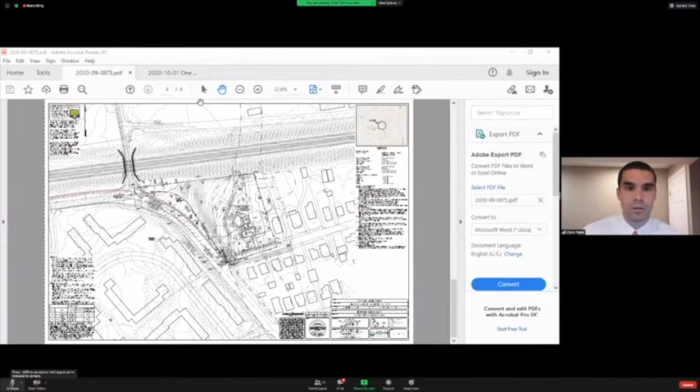So if I could forward to the first plan. So this would be, I'm going to start with the subdivision. The current owner is the owner of this 3 Elmwood property. There is this parcel line that you can see a little more clearly on this plan that separates the property into a Narberth portion and a Lower Merion Township portion.

My understanding of how that line was created was this used to be the orientation of Wynwood, and when it was adjusted to have a more gentler curve, there became a portion on this eastern side of Wynwood that is a portion in Lower Merion and a larger portion in Narberth. So what we're proposing is a new property line that's along the center line of the stream to separate the 3 Elmwood property from this property on the Wynwood side.

And then we have another property line separating 2 new multifamily buildings. They each would have 5 units in it, so there'd be a total of 10.

There currently is sidewalk along East Wynwood, which right now is right next to the curb. And so through some comments from the township, county, and borough, we're now showing a new 5-foot wide sidewalk that's pushed a few feet off of the curb. What we're showing on this plan is a shared driveway that has an ingress on the Lot 2 side and an egress on the Lot 3 side, with a shared parking lot in the back. We do show some covered parking in the back. We show a trash area, a loading space, and all of that would be shared between the 2 buildings.

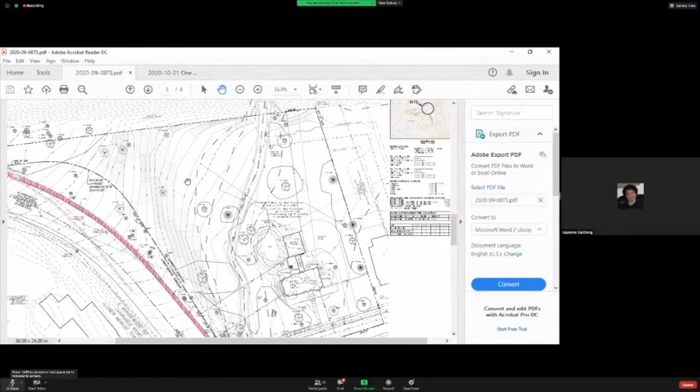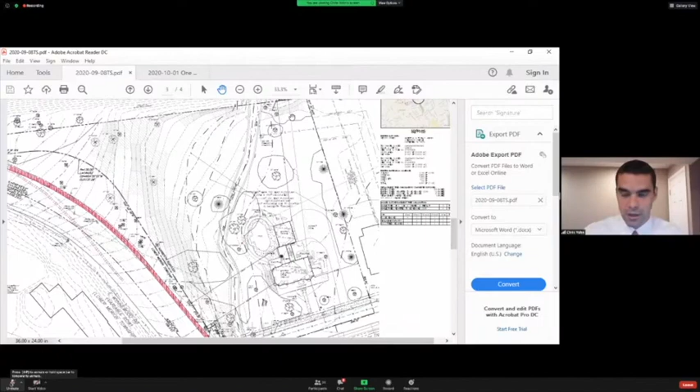If I could go back to the existing conditions plan for a second, you see the stream going through the site. These dashed lines are contour lines, and where the lines are closer together they are 1 foot apart in elevation - so closer together means steeper, you go up faster, and further apart means flatter. You can see there are not as many contour lines on the 3 Elmwood property, showing it's a much flatter property, whereas this East Wynwood side slopes up more steeply.

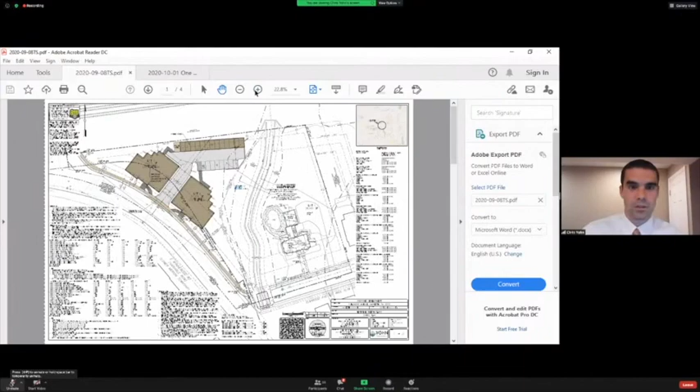The reason I show that is East Wynwood is sloping, which makes putting the units there a little trickier. What we've proposed is this unit on the right and one on the left. There are 3 levels, but on this lower level, this building on the right is more at grade, and because we keep sloping up to the left, this is really tucked into the grade, so we don't have this lower level unit on this building. On the lower level there's just one on the right, and the second and third levels would each have 2.

Conversely, on this unit, on this building too, this unit on the right is down at a lower level, a little above the floodplain. As you come up the road, on the lower level, this area would be tucked into grade, so on the lower level we only have 1 unit, on this right-hand side again, and on the second and third floor there's 2. So each building has 5 units - both have 3 on the right and 2 on the left in both cases.

Todd, did that help answer your question about the massing? Sure, we'll take that up as a topic a little later on in depth. Is there anyone else from your team who'd like to add anything of an introductory nature at this point?

Before that, a couple things I'd like to go over quickly about the engineer's letter. Item number 5 talks about the property lines. Basically the code, the subdivision code, suggests property lines should be perpendicular or radial to streets. What we're proposing as the property line between lots 1 and 2 is a meandering line that follows the stream, so we would require a waiver of that code section for that property line. I'm interested in the Planning Commission's feedback on that.

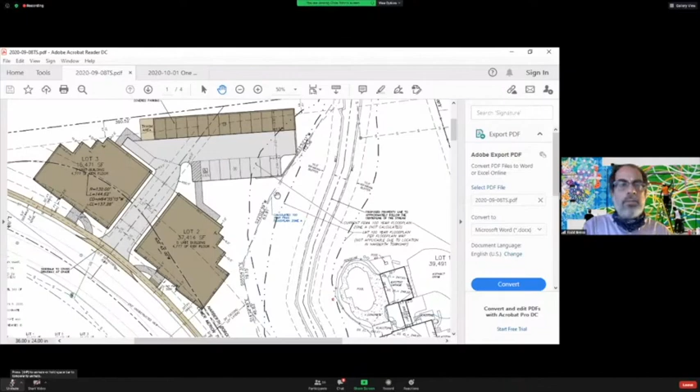So like I said, there's a lot to digest here, but I'd like to break it down into a couple topics. First, just as a formality, I want to thank your team for coming here for this informational meeting. Fred, I'm sorry I didn't do that at the beginning.

Vince — secondly, just for the public at large, I didn't say at the meeting, and we can discuss this more toward the end, but typically a land development process has 3 stages of review: a tentative sketch plan, preliminary plan, and a final plan. At each stage the project comes before the Planning Commission and before Council for approval. The whole process can take 6, 9 months, a year, or longer, depending on the nature of the project.

So this is the very first public meeting we've had about this. This is the tentative sketch plan phase. Based on what Mr. Fromhold said, we'll be back talking about this again, most likely in November. So this is the beginning of a long series of meetings on this project, both at the Narberth Planning Commission and Council. And as Fred alluded, we're in constant conversation with Lower Merion about how to coordinate our reviews, and there might even be joint meetings between our planning commissions. So that's a quick sketch of where we are in the process.

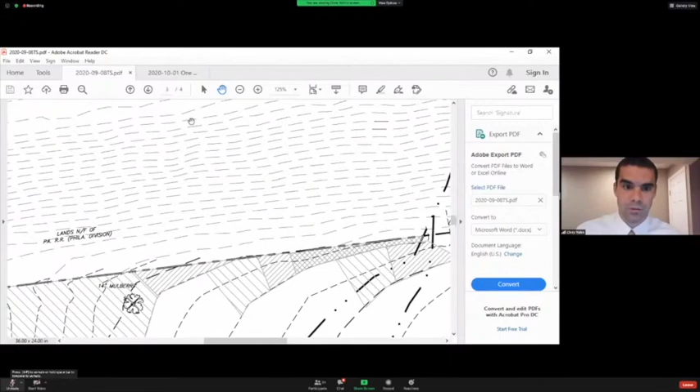We have 3 different slope patterns on the plan. The double crosshatch represents slopes that are 25% and greater, which are up through the train tracks, and as the embankment gets closer to the property line and eventually into the property, that's where there are some 25% slopes. The next range is 15 to 25% slopes with a crosshatch, and then 10 to 15% with crosshatch going the other direction. These are slope boundaries that the Lower Merion Code asks us to show on the plan.

So you can see some of those through the site. Again, the 25% and greater up here, but yes, there are some 15 to 25%, a couple ranges, and then some other 10 to 15%.

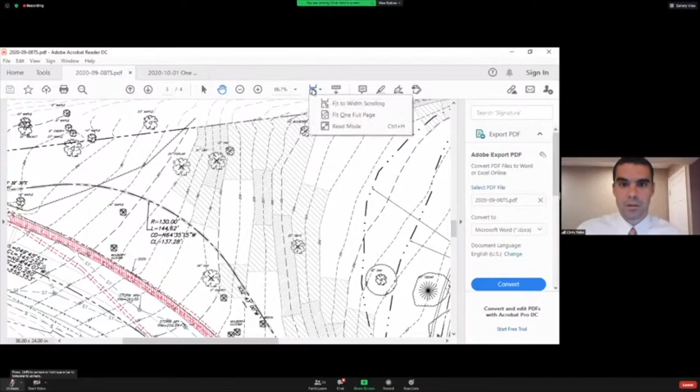So if I go back to this second page, we're not required to have all of it at this stage. My understanding of the tentative sketch phase is mostly to get the building location, driveways, access, dumpsters, and loading considered, not necessarily all the grading, stormwater, and erosion controls yet. However, we are supposed to consider that.

So we did show some spot elevations on this plan. We put approximate floor elevations for each building. For this driveway, out at the street, here's the 261 contour line, and we have a 261 spot shot back here where the buildings come together. It slopes very gently to the back of the buildings at 260.3.

I worked hard to get a relationship between the two buildings where there was not more than a 5% slope, so you could walk out of this building, come over to this handicap parking space, which can't be more than 2%, and then slope back up to 5% again to get into the other building, so there wouldn't be any ramps needed between the two.

Now, as that relates to the rest of the buildings, that's what makes this left half of lot 3, or the unit 3 building, tucked into the embankment a little bit. We show some spot elevations just to push a swale around.

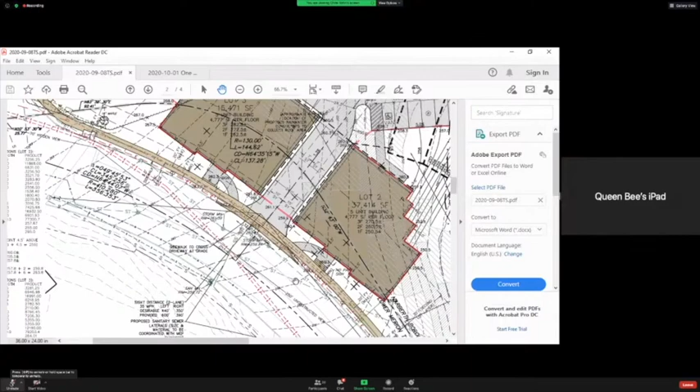So the front yard setback is determined from Lower Merion. Similarly, I don't believe Lower Merion has a regulation on where the first floor height has to be relative to the existing grade, which I know Narberth does, but I'm viewing that as not applicable since the front of the buildings aren't in Narberth. I do know we've gone through this on another project where I feel the Narberth code is unclear, at one point talking about what the first floor elevation should be relative to the grade along the front facade.

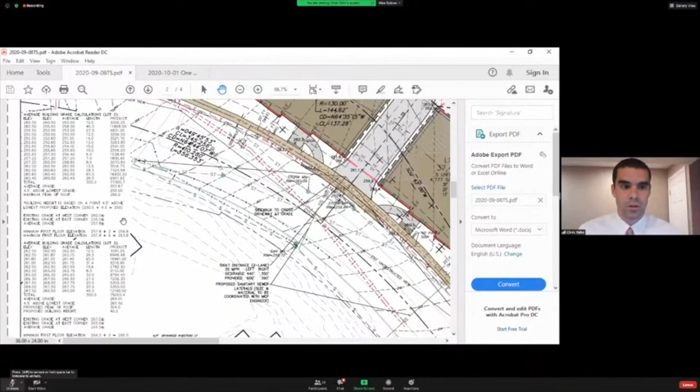At another point, it talks about the height of the building being measured from the average grade, but then in the definition for height, it mixes the two together. So on another project, to make it easier, we showed that it worked both ways. I haven't done that here, partly because I don't think what happens along the front facade is applicable to Narberth. So I've shown the average grade around the building, and then we show what the maximum peak would be. At this tentative sketch phase, we don't have 100% architectural plans to go through all those calculations. That's definitely something we need later, but at this time we're not anticipating any variances from the height.

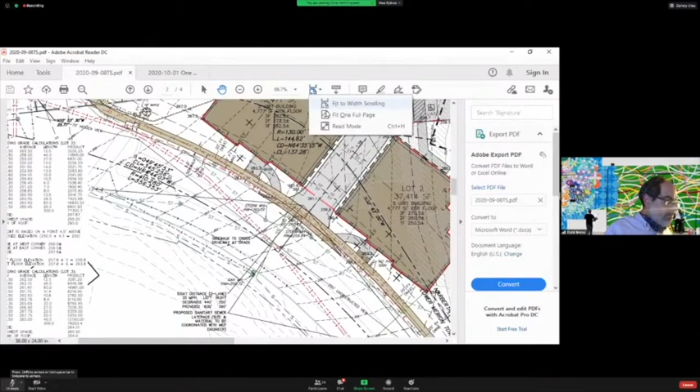Can you review your calculations for the building coverage, so we understand how you arrived at that? I think there were questions about that as well. I think there was an inconsistency between the calculation and the number in the chart.

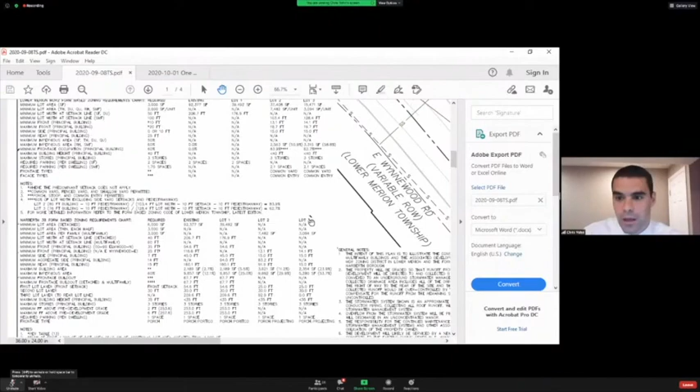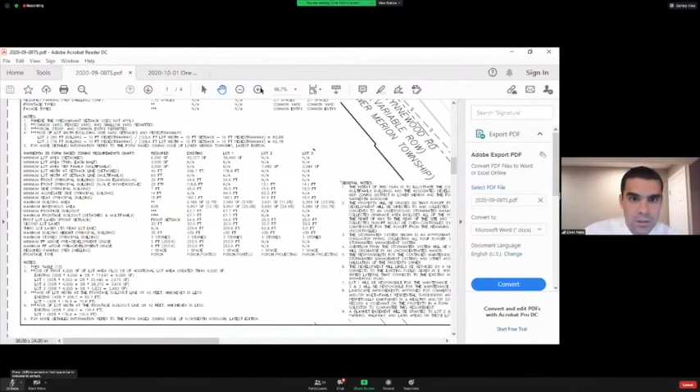Basically, Lower Merion does not have a building coverage limitation. They do have an impervious coverage. Narberth has both building and impervious. So for the Narberth portion of the site, we took the portion of the building in Narberth and divided by the area in Narberth to get the percentage. We showed some calculations at the bottom here, similar to how it was in the zoning officer's letter, where the first 4,000 square feet of lot area you take 55%, and above that you get an additional 5% to come up with the total.

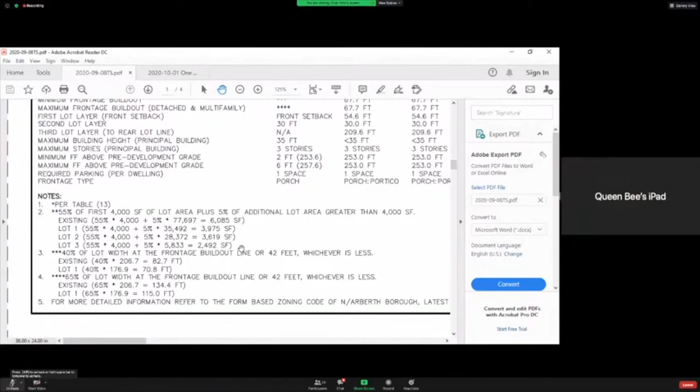So I didn't have a chance to rectify the inconsistency because I did just see this letter this afternoon, but that's something we intend to comply with. We did not intend to request a variance. So I think that's just me needing to clarify the inconsistency.

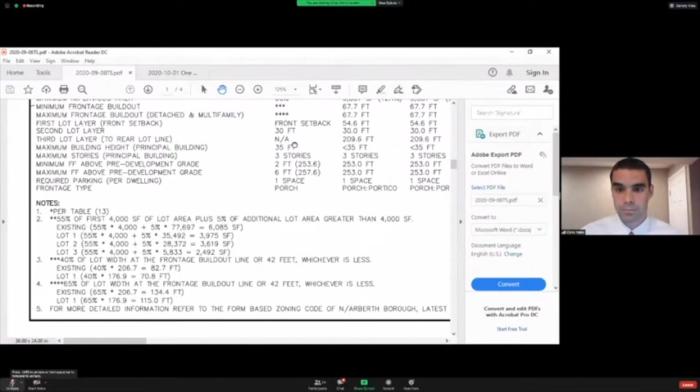All right, sorry, I'm busy trying to look at these numbers myself.

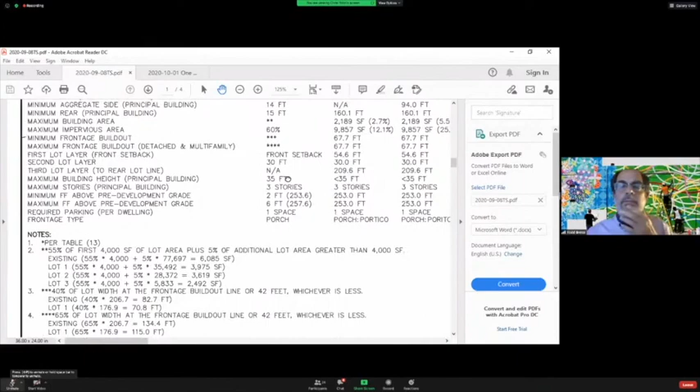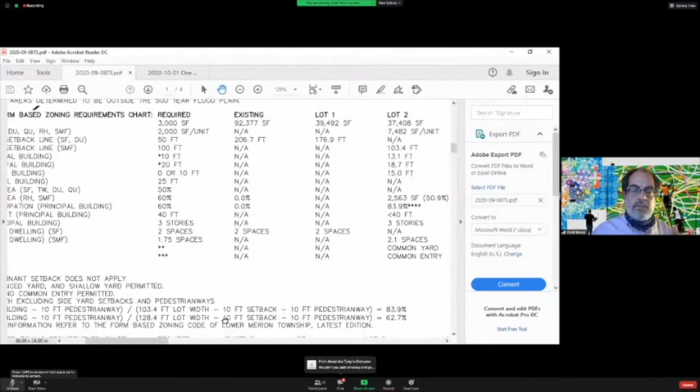Can you talk about, while I look at that, the distance of the frontage—there's a discrepancy between Lower Merion's code, which is clear about that, and our code, which actually isn't clear about that. We have a requirement for a frontage type, the way the building addresses the street. Can you talk about what frontage type you would propose to include in this building?

The porch enclosed, maybe—I don't have the answer to that at this time. I don't know if someone else from my team could help answer what frontage type that would be. I would say again that the front of the building is in Lower Merion Township and not in Narberth. So as I tried to, you can see the zoning charts here for each lot, as I tried to marry the two and comply with every section that I could.

And I should say the intent here is to comply with both codes and not go to the zoning hearing board of either. As we get comments that come up, my intent is to address those. Hopefully we don't get to a point where there's one I can't address, either because the codes conflict or because it just doesn't work with the sketch. But that frontage type was something I viewed as not applicable because the frontage is in Lower Merion and not Narberth.

Well, yeah, okay. As you know, what we're here to assess is how well this development works for Narberth. I'm not sure exactly how those places where the codes differ will be resolved. Certainly, it would help us if those aspects of our code, even if it's part of the property that's in Lower Merion, could be considered.

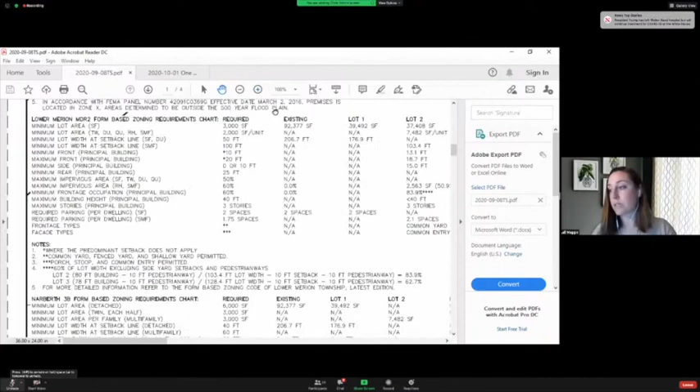On the site plan that you submitted, you actually do have those numbers shown. Under the notes at the bottom of the site plan, note number 2, you have the calculations listed for lot 2 and lot 3. There was a minor discrepancy in numbers, but it still shows that lot 2's maximum building coverage is 3,619 square feet, and the maximum building coverage for lot 3 is 2,492 square feet. So you show right here in your plans what the building limits are, and then you're proposing 5,400.

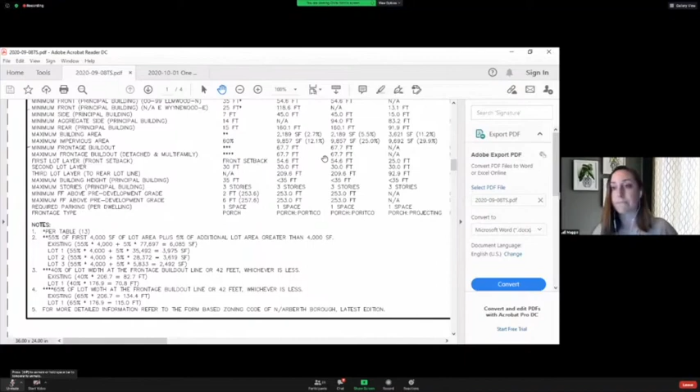I need to relook at that. My recollection of what we did was that we took the area in Narberth, for lot 3 for example, took the area in Narberth, you'd take the first 4,000 out and multiply that by 55%. Then the remaining you'd multiply by 5% to get what else is allowable, and you get the total number. The area we used to divide is just the portion of the building in Narberth. I didn't have a chance to check those numbers now. I was just going to go to my third computer here to try to look at that.

I didn't have a chance yet, but that's what I thought we did. I knew that the covered parking was pushing us over the limit. I see here that these are 4,777 square feet per floor. I'm not sure if there's a discrepancy, and there was a 5,000 number at one point, but I'll clarify that. The intent is to meet the code, so if it turns out something is wrong, I have to deal with that.

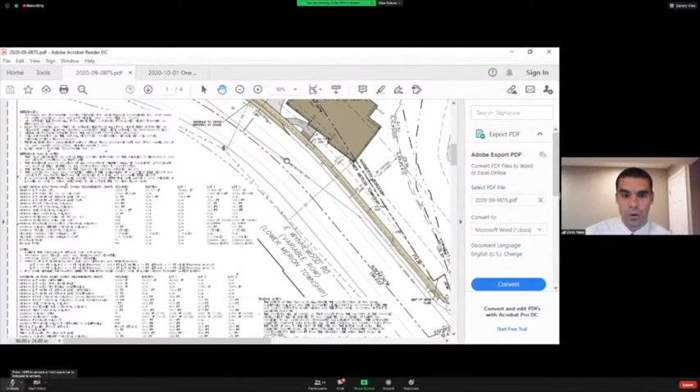Right, so that again was the inconsistency, because if we take the lot area for just Narberth, the Narberth code requires that you can have up to 5 units in a multifamily house, but you have to provide 3,000 square feet per unit, which would be... let me pull up my notes again. I lost my review letter. So if we look at the density.

You're right. The difficulty I would have is that if I take just the area in Narberth, and say, okay, that's 10,000 square feet, and that equates to 3.3 units, then how do I show that I have 3.3 units if they're not split equally? The only way I'd know to do that is to take a percentage of each unit and say, for units 1, 3, and 5, I have 0.4 parts, and for units 2 and 4, I have 0.62 parts, and then average it. That was the one that was a little more difficult than all the others.

Right. So for example, lot 3, the gross area of the lot is 37,414 square feet. If we're saying 3,000 square feet by 5 units, it's 15,000 square feet required for 5 units. But there's only 9,833 square feet within Narberth alone. So as you said, it would end up being just over 3 units, but in a building you can't really split them up that way. So again, that was being shown as compliant based on the total lot area, but not everything was based off the total lot area.

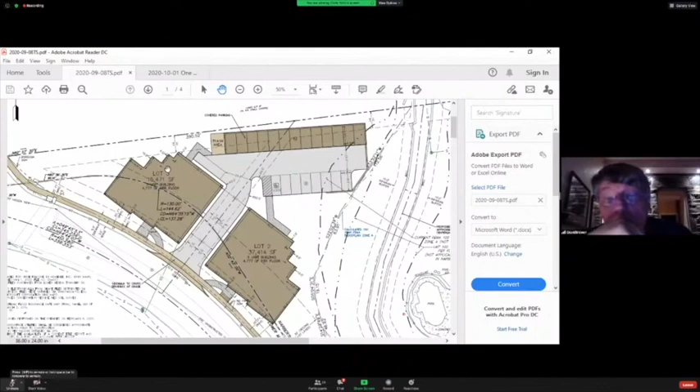So I guess it really boils down to whether the rationale for applying different standards to different calculation methods is applicable and makes sense. But yes, that was another one that came up in my review letter, was I believe you might meet the density, the square footage required for the 5 unit density for lot 2, but lot 3 you were under it, again just based off the total Narberth net area, not the total lot area.

Chris, I don't want to interrupt the train of thought, but Dave Brower is waiting to be let into the meeting, since you're the host. No, I am. You're in the meeting? Okay, and now in. I apologize for my tardiness, a little technological problem. Well, we're glad you're here now.

As you know, I'm hopefully characterizing this correctly - the municipal planning code does not provide crystal clear guidance on how these situations are to be handled, except to say the two municipalities have to work out an agreement as to how they're handled. You and I have talked, I've talked to our solicitor and our borough council, and there are at least 3 different ways I'm aware of looking at this. But I think the way I'd urge you to look at it is, even if it's determined the letter of our code doesn't apply in Lower Merion, certainly the spirit of our code applies in South Narberth.

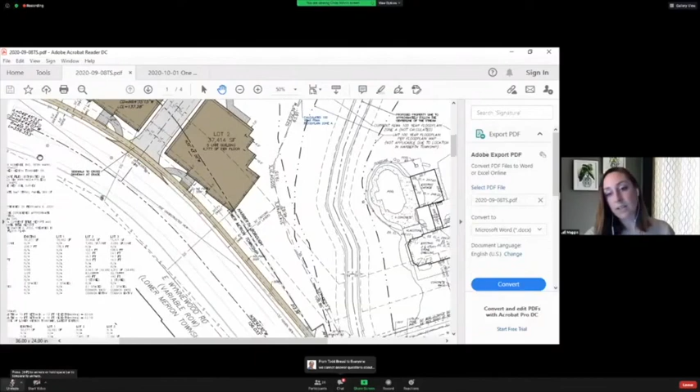The municipal boundary kind of crosses over. So are you able to clarify for us if the lot width was calculated as the full lot width, or just based on the lot width within each of the municipalities? I believe I was only calculating it for Lower Merion Township, going at the setback line, basically from the property line to the municipal boundary. But I can confirm that and show a dimension on the plan.

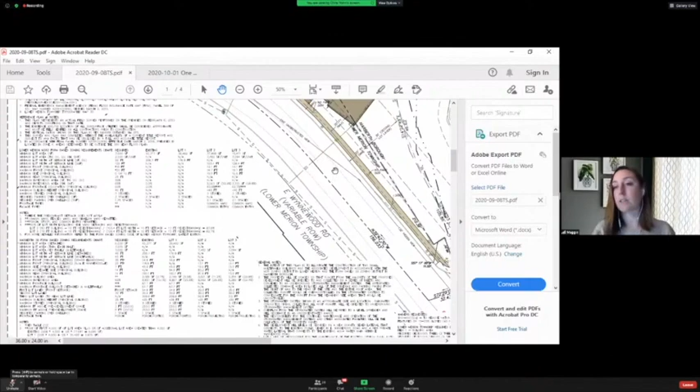Okay, yeah, because again, I know you're saying the Narberth Code doesn't apply in this case because the frontage is in Lower Merion, but in terms of whether it meets requirements—Narberth has a requirement that building frontage width does not exceed 42 feet, and it appears these buildings are going to be 80 feet wide. So the scale of the building is in excess of what would be allowed in this district if it had been entirely within Narberth.

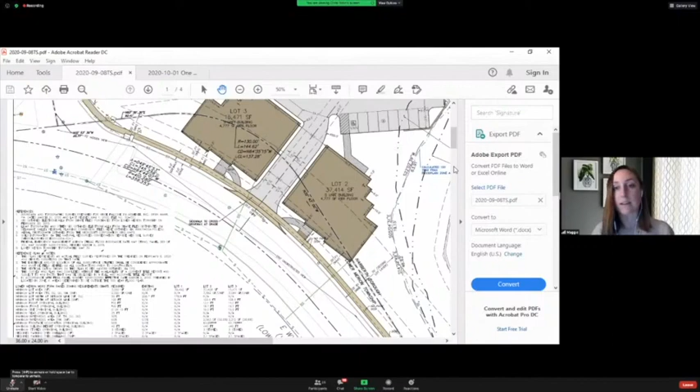I had some comments about side setbacks. We already discussed building coverage. I just mentioned the frontage build out. So in terms of the other dimensional standards, I think we've covered the majority of the ones I raised in my letter. Really it's just a matter of applying how the different codes are being applied on which portion of the lot and how it's all being calculated—that should be uniform, or some explanation provided as to how the calculations were achieved.

So I think, Todd, that sums up my dimensional standard requirements or comments. Okay, do any planning commissioners have any questions about the site planning, the building massing, building form, setbacks, things like that? Or comments you'd like to make at this point?

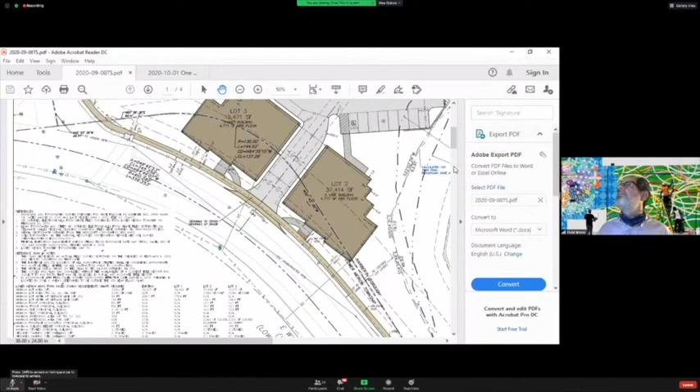I'd like to say that we don't know enough without seeing more studies of elevations and that sort of thing. Jim, specifically, I know Todd had mentioned cross sections. If there's anything in particular that would be helpful, if we could be advised of that, we would like to be able to consider that.

Well, the essence of our code, Fred, is that the form of the building is what we are concerned about more than anything else. We're arguing about how many feet, inches, and fractions of inches are shown on an engineering site plan, but in reality this building will be experienced in terms of what it looks like as people drive down Wynnewood Road. So I would want to see evidence of that before becoming comfortable with the site plan.

The site plan worries me a little bit. The buildings are too big and they're too close to the street. It's as simple as that. There may be ways of mitigating that by deft handling of the elevations, but I haven't seen that yet.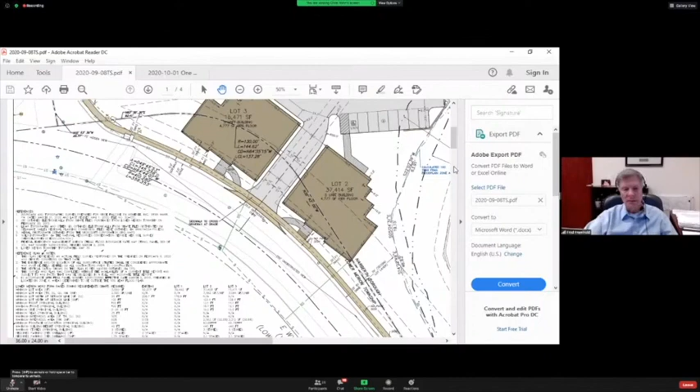Comments from other planning commissioners? I have some. Can you hear me, Todd? Yes.

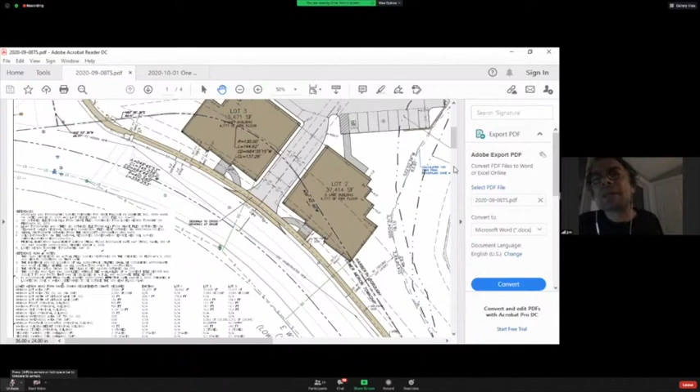I have a question I haven't really been able to look into on my own yet, but it has to do with the surface parking in the rear. I'm not aware of any other residential surface parking that's shared across a lot line. I believe we have provisions for commercial shared parking, but not residential. Here we have, on paper, two separate surface lots, but they flow into each other seamlessly, and a number of parking spots straddle the lot line. I wonder how that's dealt with in terms of setback. How can you set back part of a parking space or part of a surface lot from the lot line if the lot line runs straight through it?

How is that handled? Can I just clarify, Jim? Unless I'm mistaken, the code does allow for parking spaces to be shared among uses on the same or adjoining lots if it meets the standards of shared parking. So if it meets certain standards, it is allowable. But your question is a good one—how's it managed?

I would just like to say one thing. Can you hear me? Yep. Okay, so I guess in response to what Jim was just talking about, if this isn't covered, that wouldn't apply. If it's covered, Jim's concerns would apply.

Yeah, exactly. But I'd also like to agree with what Jim Cornwell was saying about the form of these buildings. It's a very strange situation, being partly in Lower Merion and the front of the buildings being in Lower Merion, but clearly from an aesthetic point of view, coming down Wynnewood, you're still in Narberth—it's still part of the Narberth fabric. The right thing to do would be to develop these buildings as if they're continuing the row of homes that are on Wynnewood. The 42-foot width should apply.

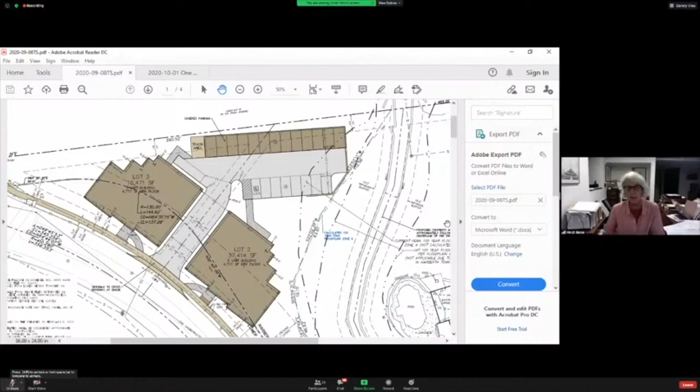I would hope that Lower Merion would look at it that way, especially since they spent so much time putting together their form-based zoning code recently. There ought to be some way to dictate how these buildings—the form, the massing, slope aside—just how they look on the site. And I would add too a concern about the front yard setback. I think that also needs to be consistent with the borough code.

I think that is just an area where there's actually a clear conflict with Lower Merion's code, if I'm not mistaken. It's just an informational point in terms of what Lower Merion requires. It would be interesting to ask, and we can do this when we have a joint meeting with Lower Merion, whether they even understood this was part of their municipality. The letter from the MCPC to the Lower Merion staff seems to indicate this area wasn't actually included in some of their planning, and whether they really gave this much thought when they mapped it the way they did. So that will be a conversation we can take up with the Lower Merion planning commissioners and staff when we have a joint meeting with them.

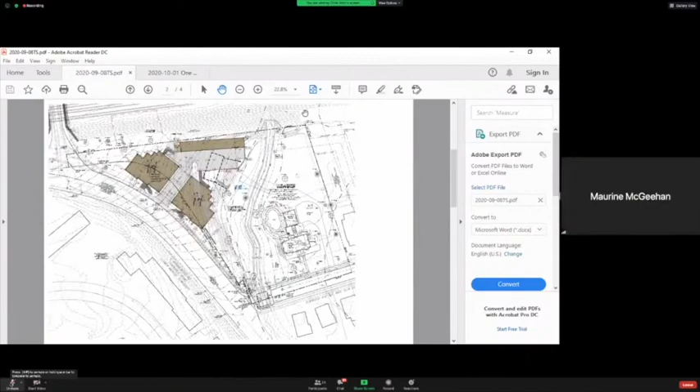At this stage, we don't have to go through the full stormwater calculations, but we're supposed to show the intent. Basically, for both Narberth and Lower Merion, we need to meet the code requirements for rate and volume controls. You try to collect as much of the site as possible, but it's not always possible to collect everything because you're kind of chasing your tail, where you put the stormwater on the low side and then you're trying to collect area that was for stormwater to do more stormwater.

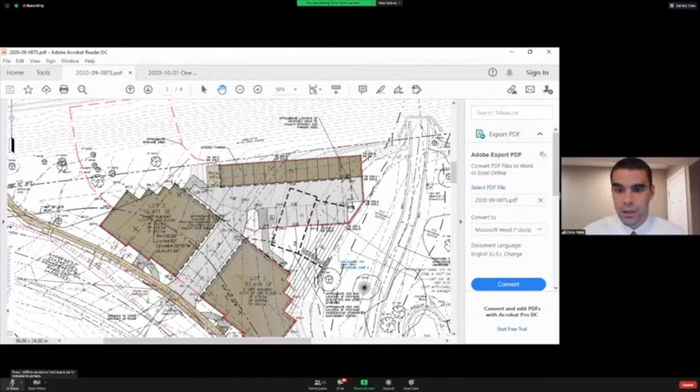So what we've shown in this plan is a drainage area line in red, which is where we're anticipating collecting the area. We then have this rectangle with a thick dashed dark line, which is the anticipated size and location for an underground stormwater system. Again, it's not sized yet, but that's the anticipated size, and we'd pipe the downspouts from both buildings to that. We show an inlet here in the parking lot and some spot elevations and arrows showing the stormwater would flow down through here to this inlet, be piped into the system, and out to a level spreader where it would be discharged. Hopefully that answers a little bit of your question, and hopefully this will answer the rest.

When we do the stormwater calculation, we have a pre-development number for the maximum allowable flow that can leave the site. When we analyze the post-development flow, we separate it into two parts. One is the controlled part, which is in red—we'd run it through the system and slow the water down. Then there's an uncontrolled part, like this area here, where there's a slope from the system down to the spreader, a little bit of walkway. There'll end up being some uncontrolled area on the downside of the wall, and any grading that happens in that area.

We run that uncontrolled as-is because we can't slow that down, so whatever rate that is, it is. So we might have to slow down what goes into the system even more to make sure we meet those requirements. That's what I'm trying to convey with that note: we're collecting as much as we can, but what we can't collect—say this graded area here—we'll slow the collected water down even more to make sure that overall we meet the code requirements.

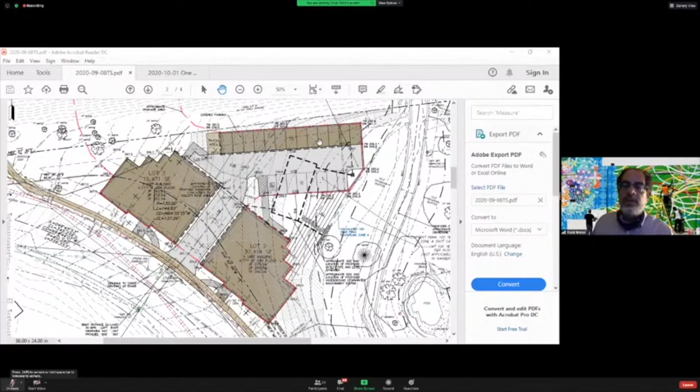I would tell them that our initial calculations of the watershed, about 350 acres, is what drains through here. So these lots 2 and 3 are about 1 acre - in terms of the overall amount, this is a drop in the bucket. That being said, we still are going to work to meet all of both Lower Merion and Narberth requirements for stormwater management, just as their properties would have to if they developed theirs, or any other property in Lower Merion or Narberth.

But if you observe that kind of... I know that the creek drains a large watershed upstream, but have you observed that same kind of sheeting on this particular site? That means that in a particular storm event, there's a large quantity of water that's amassed and passing through this site. I believe that's the implication. Do you have a way of observing or measuring that, or dealing with it?

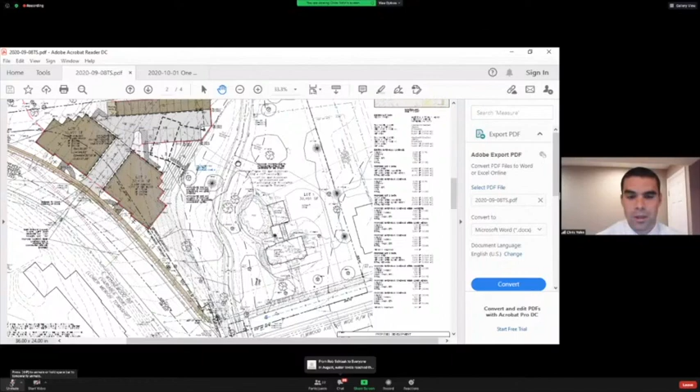I forget if this was a hemlock or cedar tree. From the pictures I saw, it looked fairly consistent with the blue line, and at this location it actually looked like the blue line was further out than where the water was. I also saw an article from a Chester County engineer that said based on the depth of flow and the time, that could be equated to a 1,000-year storm. So I did see a few things, but I didn't see anything that showed the current FEMA line or the blue line were off base.

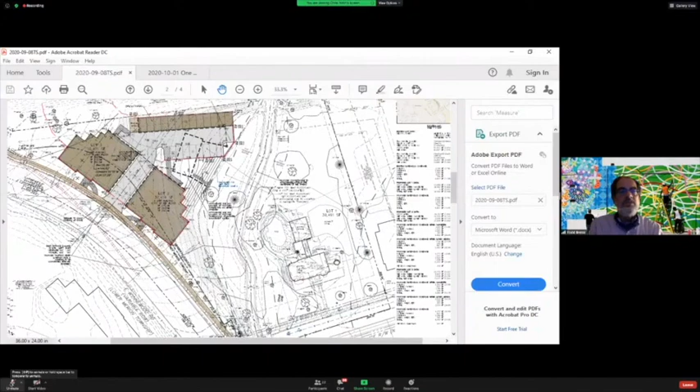Right, but I think the implication is it's not so much about the lines, but the water you're observing there - some of it is coming down through the site that's going to be built on, water coming from the road, water coming from the railroad embankment. You've shown a small area that you would capture, the red area, of the embankment. The question I'm seeing is would this development exacerbate, channelize, and accelerate those other flows that are already causing problems for this area?

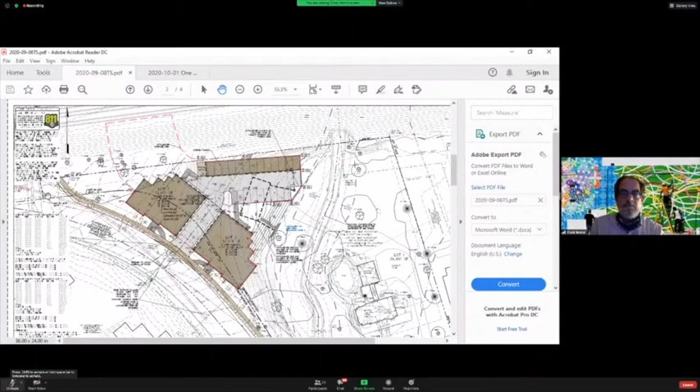I'm not sure how any water traveling down East Wynwood, based on the contour lines, would be entering the front of this site, and it certainly wouldn't later once the sidewalk is built - there's curb here, sidewalk behind it, so we'd have the same condition later which wouldn't allow water to come into the site. In terms of any water that comes uphill, we are showing a little off-site. If when we get further into the calculations we find there's more, and it's appropriate to put a few drains on the high side of this building, then we will do that and pass it through the same way it travels through.

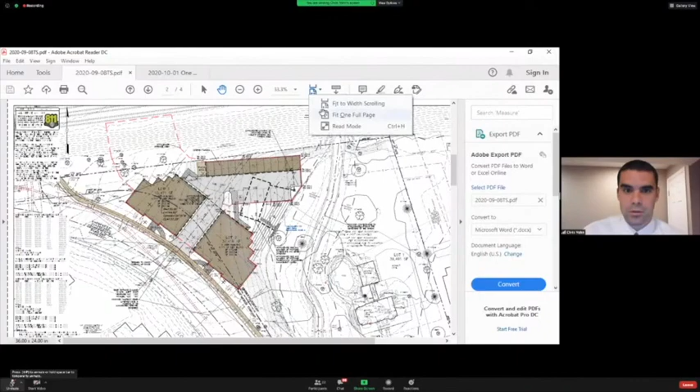So based on the contour lines I see, let me switch to this other plan. We're here - it looks to me the most that could enter this site would be going up to the railroad tracks and over to the bridge. If we get further into the design and we need to include a little further area, then we'll do that.

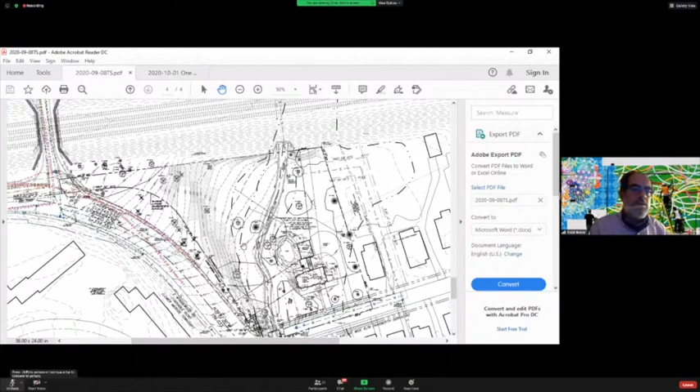Okay, are there questions from any other planning commissioners about this topic, or any other topic that I might not have raised so far this evening? Jim, Dave, Heidi, do you have any other questions about this or any other topic? Maggie or Eric, before I ask for the public comment section of the meeting, is there anything else you would like to ask about or comment on that you didn't have a chance to comment on earlier?

You guys okay? I'm just wondering, Chris, have you guys put any consideration into what the stormwater would look like with the other driveway design?

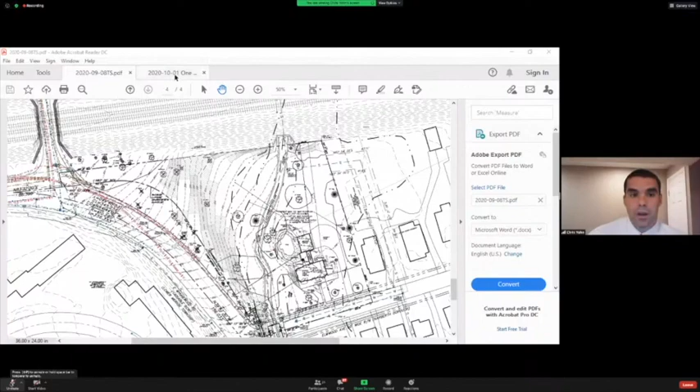I have not gotten that far yet, but I assume it would be very similar, with an underground system underneath what will end up being an elevated driveway. I'm sorry that I missed some of this discussion. What we show here along this right-hand side of the driveway is a retaining wall that would essentially hold up that parking. So it would be a similar design where the system would be in this elevated area, and an overflow would come down on the low side of the wall.

Do you know approximately how high that retaining wall might be? This time, it's just preliminary, but it looked like it'd be 4 to 6 feet. Okay, thank you.

Mr. Falcone, or anyone else from your team, do you have any comments you've been waiting to make before I ask for public comment? I do not at this time, Todd, thank you.

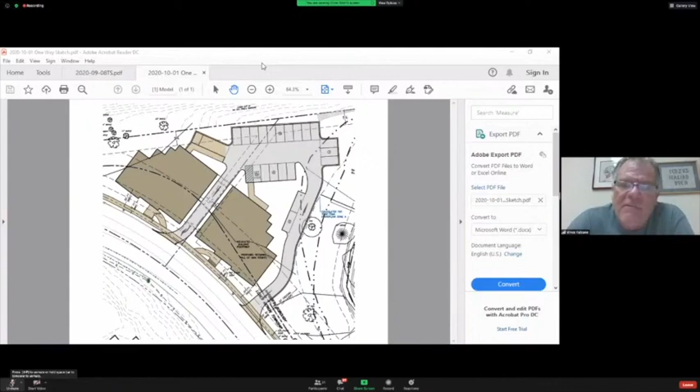I have a question for Mr. Falcone, if you don't mind. I wanted to ask this at the beginning but forgot. I see that the owner of record is a different entity from you. Can you tell us what your interest in this property is? I'm not 100% sure yet. I have multiple options. I'm thinking possibly of keeping the units and using them as rentals, but possibly selling them. Until I find out the finalized plan and what they are, I'm not ready to make that decision yet. But I think he's equitable owner under an agreement of sale. Okay, yeah, thank you, thank you.